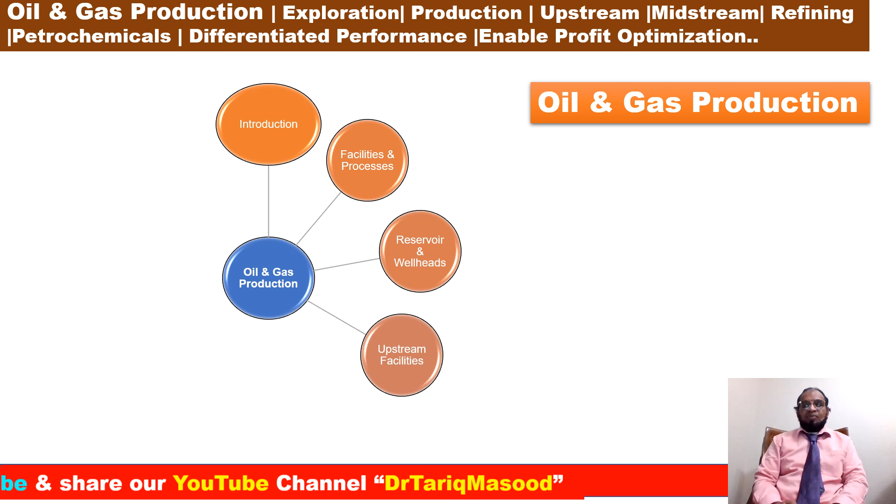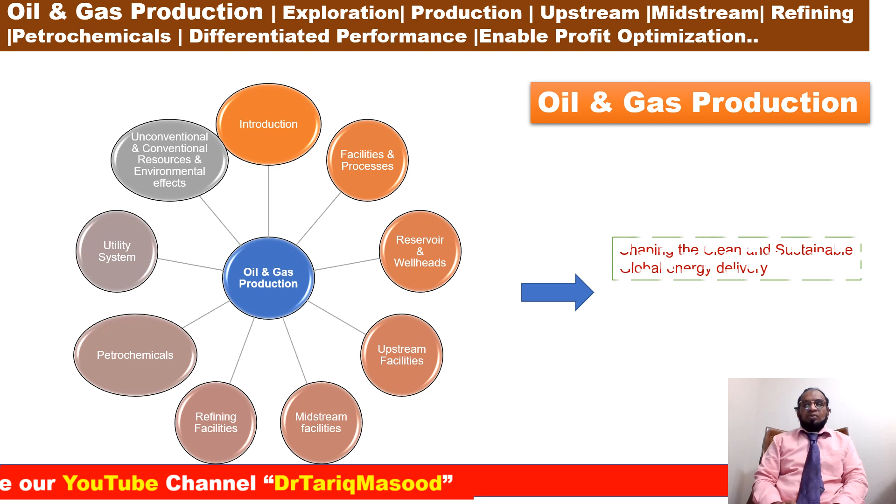Oil and gas production, introduction, facilities and process, reservoir, wellhead, upstream, midstream facilities and refining, petrochemicals, utility systems, unconventional, conventional, environment effects. So what is the ultimate goal? Shaping the clean and sustainable global energy. Plan to deliver more than 300 lectures next couple of years.

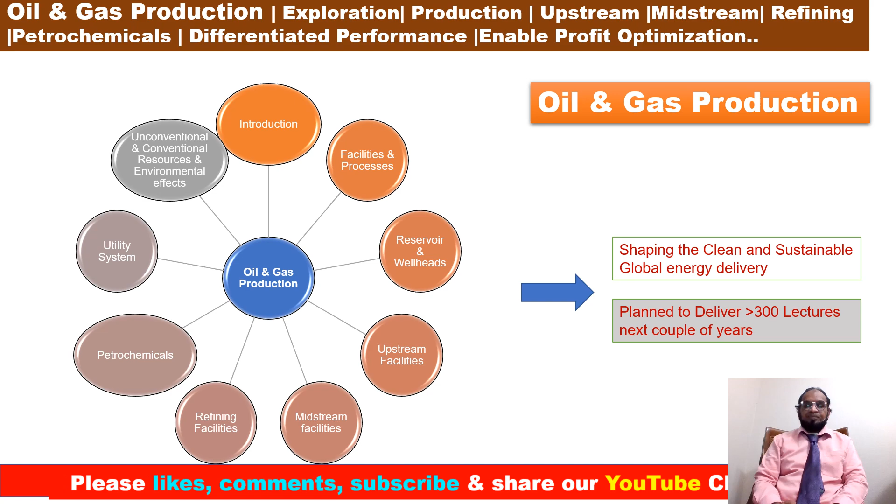Oil and gas production, midstream facilities, lecture number 19. Gas dehydration, mercury removal and sale gas specification. Key takeaway points from lecture number 19: gas dehydration, mercury removal, sale gas specification we are going to discuss today.

Dehydration: the separated gas may contain mist and other liquid droplets, drops of water, and hydrocarbons also form when the gas is cooled in the heat exchanger, and must be removed before it reaches the compressor or other processing purposes. If liquid droplets enter the compressor, they will erode the fast rotating blades. A scrubber is designed to remove a small fraction of liquid from the gas.

There are various types of gas drying equipment available, but the most common suction compressor scrubber is based on dehydration by absorption in triethylene glycol (TEG). The scrubber consists of many levels of glycol layers. A large number of gas traps (enlarged detail) force gas to bubble up through each glycol layer as it flows from the bottom to the top of each section.

Processed glycol is pumped in at the top from the holding tank. It flows from level to level against the gas flow as it spills over the edge of each trap tray. During this process, it absorbs liquid from the gas and comes out as rich glycol at the bottom. The holding tank also functions as a heat exchanger for liquid to and from the reboilers.

We also use a flash tank, surge drum, etc. The glycol is recycled by removing the absorbed liquid. This is done in the reboiler, which is filled with rich glycol and heated to boil off the liquid at a temperature of about 130 to 180 degrees Celsius.

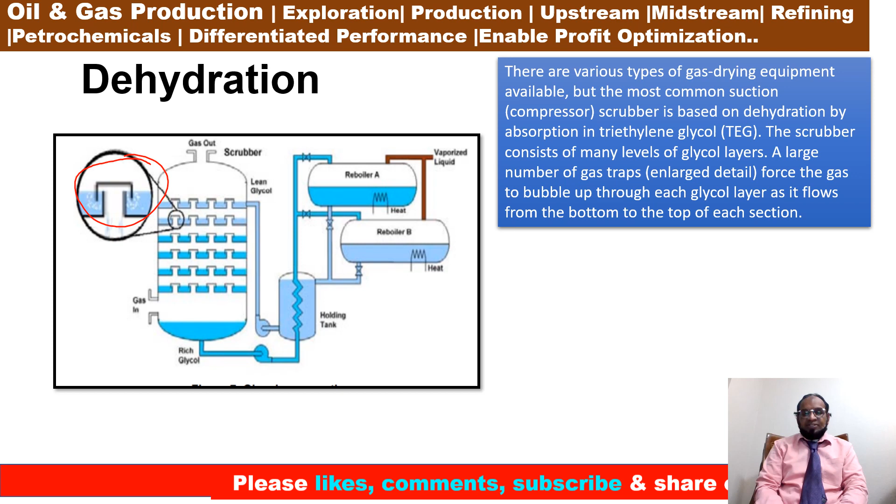Mercury removal is generally based on molecular sieves. A molecular sieve is a substance containing a material with tiny pores to achieve a large surface area, such as activated carbon. The surface of the material allows certain molecules to bind by surface tension.

The molecules can later be extracted and the sieve materials regenerated by heating, pressure and/or purging with a carrier gas. A molecular sieve is commonly cyclic, with one active unit and one or more units in regeneration cycle.

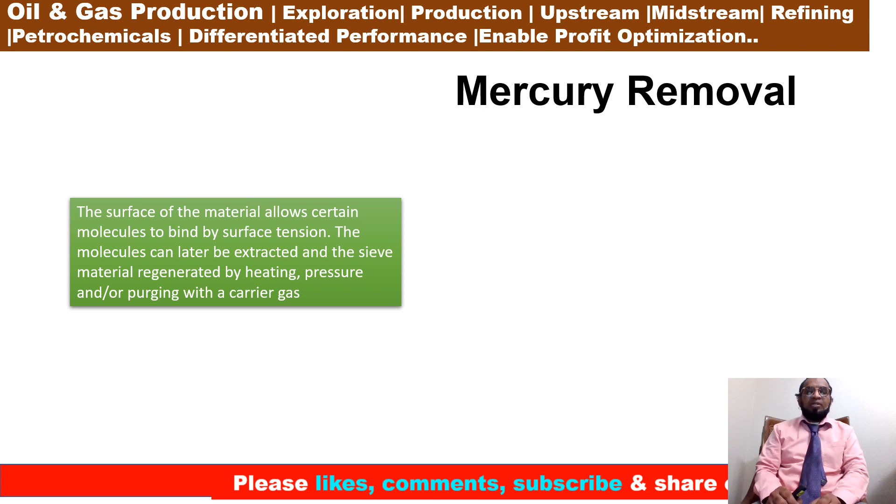Nitrogen reinjection: excessive nitrogen is removed by cryogenic distillation, and higher concentrations are removed by absorption with a lean oil or other special solvent if a smaller fraction is detected. You can also see my last lecture on acid gas removal for both principles. Cryogenic removal also permits production of helium, if present, as a valuable byproduct.

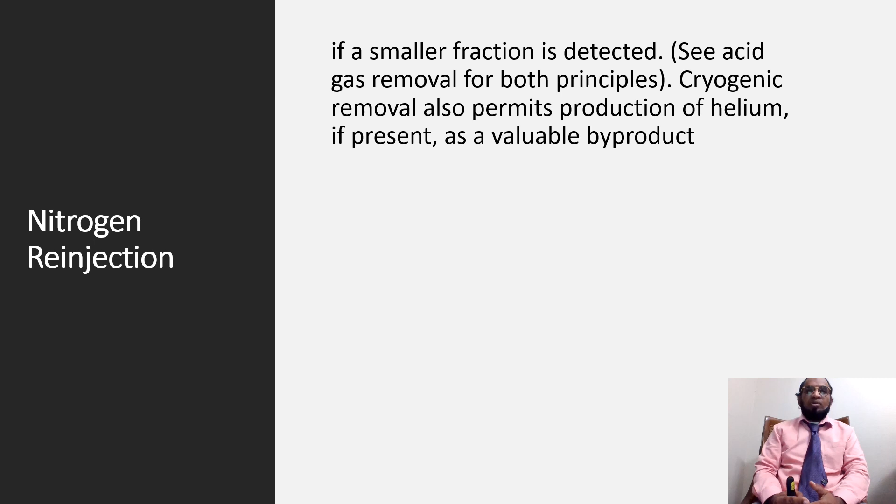NGL recovery and treatment. Remaining NGL are recovered from the gas stream in the most modern plants by a cryogenic turbo expander based process, followed by a fractionating process. This process leads the cooled NGL through distillation columns called De-ethanizer, De-propanizer and De-butanizer to extract ethane, propane and butane respectively, leaving a residual stream of pentane and higher hydrocarbons.

The final step is to remove mercaptans, smelly organic gases (CH3SH), if present, in a sweetening process based on molecular sieves, adsorptions, or catalytic oxidations such as Merox (mercaptan oxidation) or Sulfrex, where the main difference is the type of catalyst being used. So from the next slide we'll discuss sales gas specification.

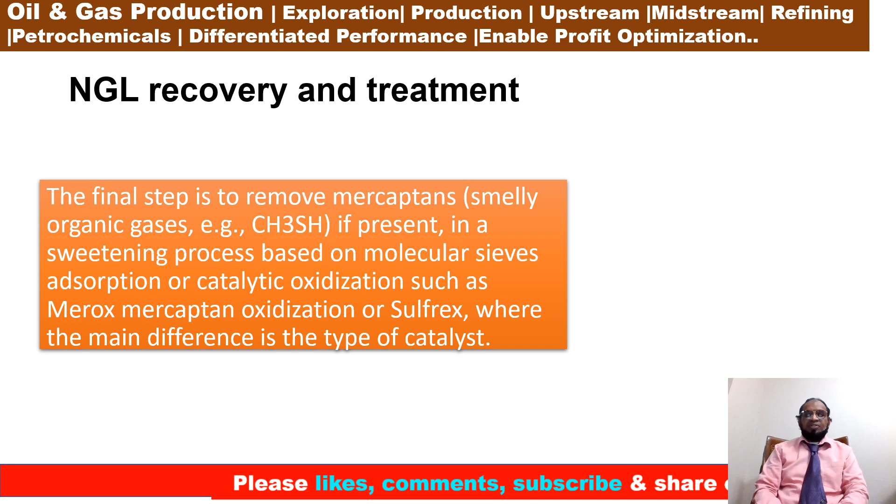Sales gas specification. The exact sale gas specification is specified by pipeline operators and distributors. Typically, standard sales gas requirements use the following parameters.

First, volume is measured in standard cubic meter (SCM), defined as 1 cubic meter at 0 degrees Celsius and 101.325 kPa (kilopascal), or standard cubic feet (SCF), defined as 1 cubic foot at 60 degrees F and 14.73 psia absolute pressure.

Now the calorific value specifies the total amount of energy per unit generated during combustion of the gas. The value is used to calculate the amount of energy delivered. Several values are discussed: first is gross calorific value or gross heat of combustion, second is net calorific value or net heat of combustion.

Gross calorific value or gross heat of combustion is the heat released when a specific quantity of fuel mixed with air is ignited and the end products have returned to the initial temperature, normally 25 degrees C. EU specifications are typically 38.8 MJ, 10.8 kWh, plus or minus 5% per cubic meter. In the US, 1030 BTU plus or minus 5% per SCF.

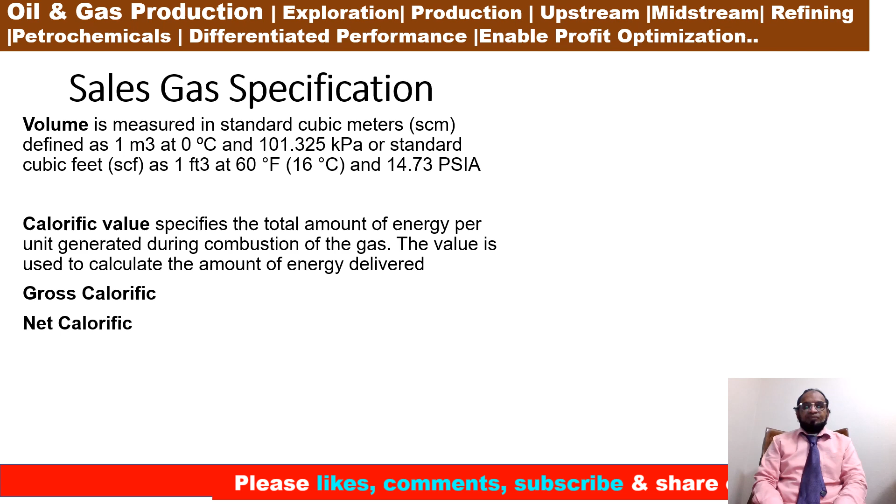Furthermore, sales gas comprises: Wobbe index, methane number, H2S, mercury, dew point, particles, and additives. First, we'll discuss Wobbe index. Wobbe index measures the heating effect that a burner is exposed to during combustion. A higher value means a greater thermal load on the burner.

Different gases with the same Wobbe index will impose the same load on the burner. An excessively high value is a safety hazard as it can lead to burner overheating and excess production of carbon monoxide during combustion. Calorific value and Wobbe index can be adjusted by blending gas from different sources as well as by addition or removal of nitrogen.

Number 2, methane number is a value similar to octane value for gasoline, and is important when the gas is used for internal combustion engines, as in CNG, compressed natural gas.

Number 3, hydrogen sulfide or overall sulfur content. Both hydrogen sulfide (H2S) and total sulfur must be reduced. H2S is toxic as well as corrosive for the pipeline, as it forms sulfuric acid (H2SO4), and should be kept as low as possible.

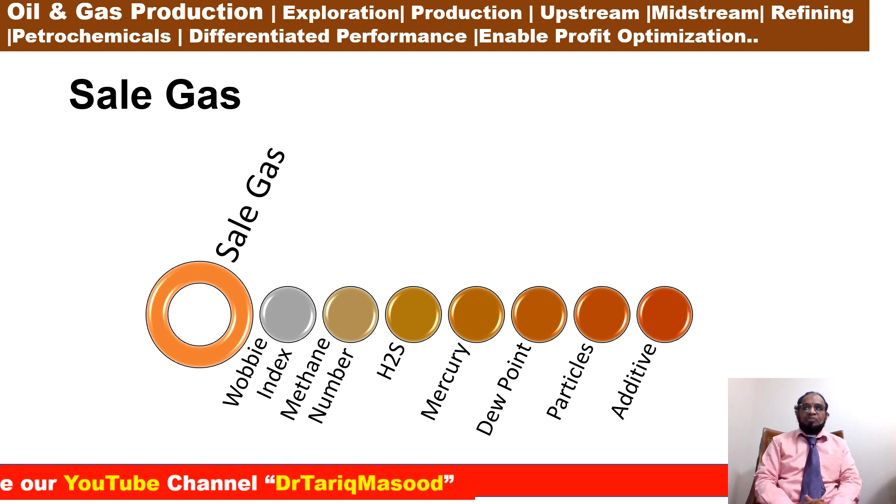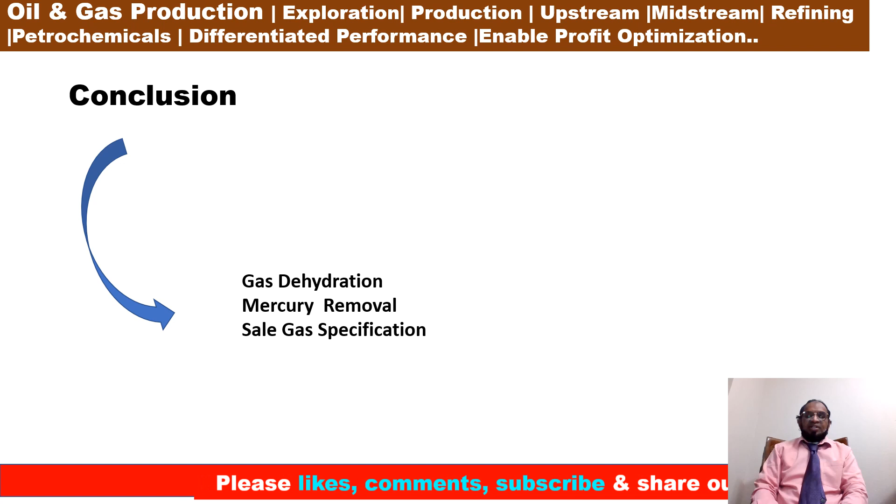Today we discussed gas dehydration, mercury removal, and sales gas specification. My next lecture will first cover pipelines, and then we will talk about LNG.